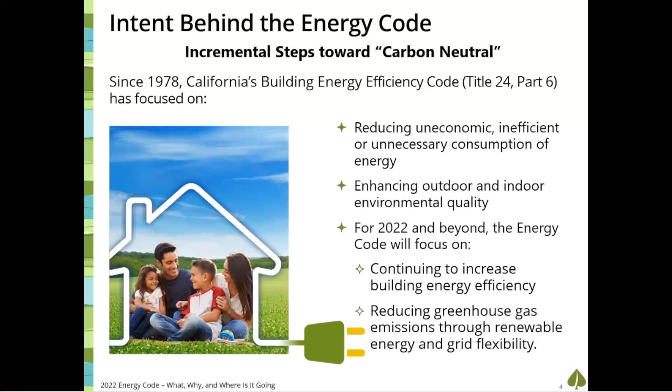If they're utilizing that energy, they're not drawing from the grid, and we have a much better or sustainable grid in that measure. So now some of the benefits of our energy code, I mean, these are self-evident, obviously. We've talked about a few of these in the previous slides, but avoiding building new power plants, they're very expensive. There's a lot of regulatory requirements to build new power plants, and most of the new power plants that have been built in recent years are fuel-fired or peak plants.

So they're not low emission plants. So if we can avoid that, we can not only keep our energy costs low, but we can also avoid those higher carbon emissions that would be embodied in that energy. So meet resource needs at lowest cost and least environmental impact. Again, if we can save energy, we can do that much more efficiently and economically than building new power plants. Increase building energy efficiency. That's a no-brainer.

Contribute to the state's greenhouse gas reduction goals. Again, some of those legislative actions, AB 32, the Global Warming Solutions Act, or other assembly bills and bills passed in the state to uphold our goals here. That bullet, enable pathways for all electric buildings. If that sounds like a no-brainer, let me give some context to that.

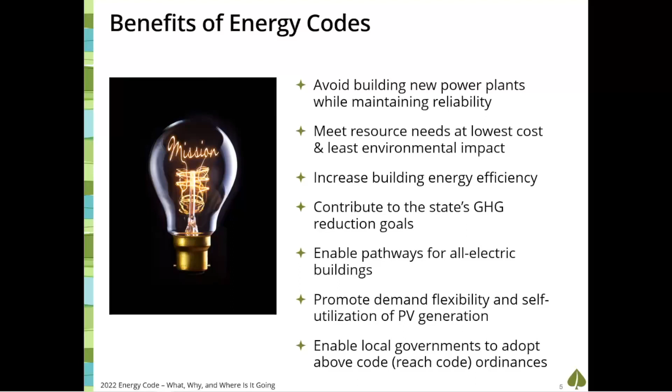And then lastly, our energy code does offer that option for local governments to adopt above code programs, ordinances. We call those reach codes. That's when a jurisdiction can go beyond what the energy code is. Our energy codes are minimum requirements. This is the bare minimum that you can build a home or a business to. And some of these reach codes, through the approval of the Energy Commission, have got above code programs that require higher performing buildings.

Now, we can see that our energy codes do serve a purpose, not just benefiting us as individuals. Excuse me. But we can see when we compare the per capita energy use, and this is electric energy use across the US, you can see that the intent or the benefit of our energy code has really paid off. Now, I can tell you that the demand for electricity has not gone down in California compared to the rest of the US. These are representing energy savings.

I don't know about you, but these days there are more and more things that are plugged in our households and in our businesses. Phones and gadgets and computers and TVs, and the list goes on and on. So that is really there to prove that our demand has not gone down for electricity, but through our energy code, our regulations, the usage of our electric appliances and systems has maintained a fairly level trajectory over the years that we've had energy codes in place here in California.

You can see that the remaining states in the U.S. have tapered off, but by far, California has made some major advancements and is really leading the U.S. in energy efficiency. Not to say that some other codes may have some more stringent requirements, but by and large, overall, the requirements that apply to all buildings in California are much more stringent than anywhere else in the states.

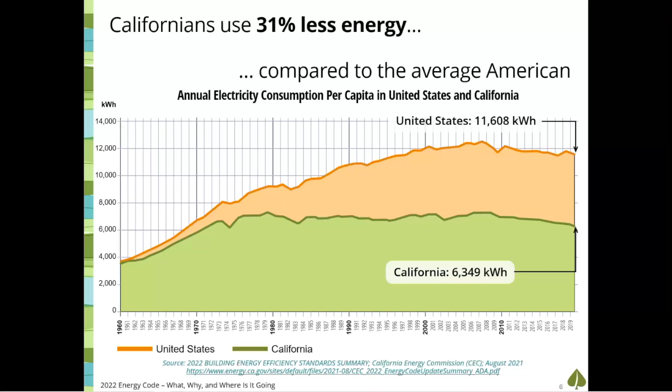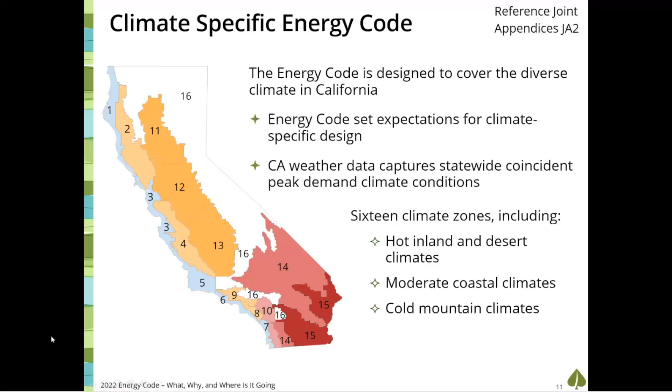Now, as far as our energy code requirements are concerned, we do have options for demonstrating compliance for our buildings. Now, mandatory measures, if they apply to your project, must always be met. And that really rings true with the name. If it's mandatory and it applies to your project, that must be done. You can't trade these off. You can't performance your way out of mandatory requirements. They just need to be met. And generally, mandatory requirements are determined to be cost effective in all climate zones. We've seen a few exceptions to some mandatory requirements that are specific for certain climate zones, but generally speaking, mandatory measures are measures that are cost effective. They save energy in almost any situation.

So these focus primarily on minimum efficiency requirements of our appliances, so heating and cooling equipment, as well as water heating equipment and any other appliance that could be plugged in our buildings. Distribution systems of those heating cooling systems, minimum insulation requirements for ducts, air sealing and testing for duct air distribution. We've got mandatory requirements that address health and safety needs, like whole dwelling unit ventilation requirements. Again, those aren't energy efficiency measures. Those are life-saving measures that apply to all buildings.

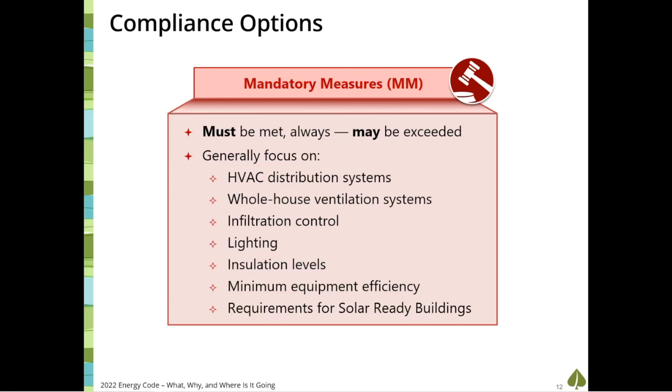Now, once those mandatory measures are met, there are two approaches that you can use to demonstrate compliance with our energy code. On the left-hand side, we have our prescriptive approach, and it's just that. There's a prescribed features list based on the climate zone that your project is located in. This is a very simple but, you know, easy or inflexible way to comply with our code. You go to the prescriptive requirements, and all of the features that are listed for your climate zone must be met or exceeded. And if you do that, then the project automatically complies. Still needs to provide the documentation to do that. But if you follow the prescribed energy features list, then your project meets our energy code. Very inflexible. There's not a lot of opportunity to trade off or provide some design flexibility.

That's why we have a performance approach, and what that does is allows the designer to test various ideas or concepts for providing efficiency to that building. So you can trade off certain features for other requirements, as long as the proposed building uses equal to or less energy than what the baseline is or what you're allowed to use. Now that baseline or the allowed energy usage is based on those prescriptive requirements.

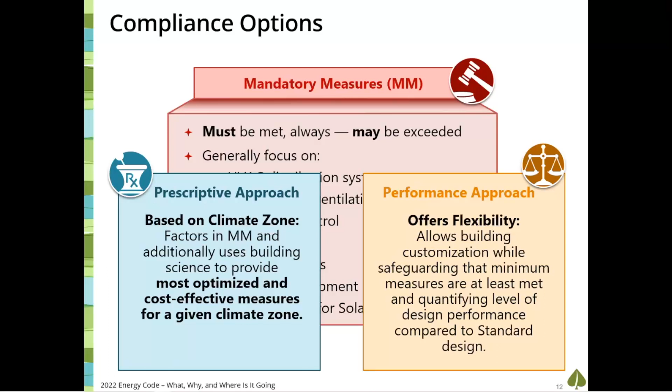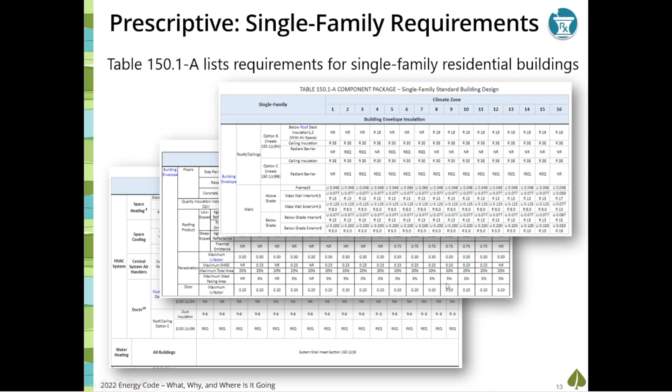You can see it goes through roof ceilings, walls, floors, talks about the quality of insulation installation. It's a HERS verified measure, QII. Roofing products, talking about cool roofs, fenestration, windows, glazed doors, skylights, doors, and goes on through our space conditioning and water heating systems.

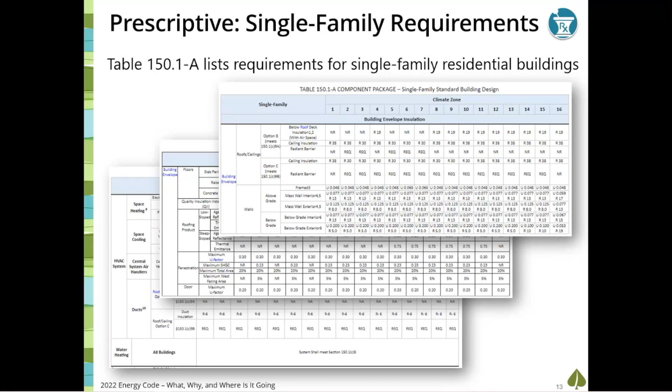Now, we have a very similar table for our multifamily buildings. This particular table is kind of a hybrid from the 2019 code. As I mentioned earlier, our energy code has dedicated chapters now for multifamily buildings, where those 4-story or more high-rise residential buildings found in subchapters 3 through 7 had certain requirements, and low-rise residential, 3-story and less, had other requirements in different chapters. Here's where we're seeing all that information coming together. Some requirements that applied only to high-rise residential now also apply to low-rise residential, and vice versa. So we're seeing a very flexible energy code, and the inclusion of those new chapters made this all possible.

So again, the same principle applies. Find the requirements that apply to your project based on the climate zone. And if you comply prescriptively, you would need to meet all of the applicable requirements for that climate zone in order for a project to be compliant. Otherwise, you would have to use the performance approach. So it's one or the other. In some cases, with some buildings, you can utilize both prescriptive and performance. But for single family and low-rise multifamily, it's one or the other. You can't use a combination of both.

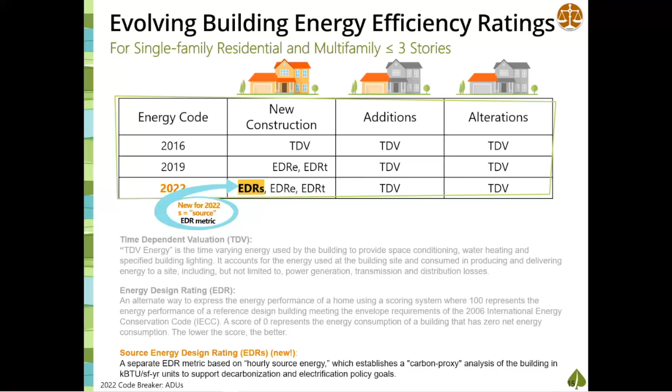Good question though. All right, a little bit more detail on our EDR metrics and how those apply and what features in our buildings are regulated under each of these metrics. You can see our source EDR, that's our carbon metric. It's a score representing the building's energy efficiency in terms of hourly source carbon.

Now, when we talk about source carbon, we're not just talking about the source coming from the utility. There is a fair bit of carbon, embodied carbon, in the generation of electricity from the utility. There is also some source carbon based on the fuel type chosen by the builder or occupant or building owner. So both of those are regulated under this requirement. So even if you have an all electric building, well, guess what? You still are, I don't know what the term is, but using a carbon-based energy unit.

So until our utilities, which are regulated and have a goal to be, I think, and maybe Long, you can help me. I'm not really familiar with some of the generation, but I know the utilities are required to have a renewable portfolio by a certain date and time. So really that's regulated by our Public Utilities Commission.

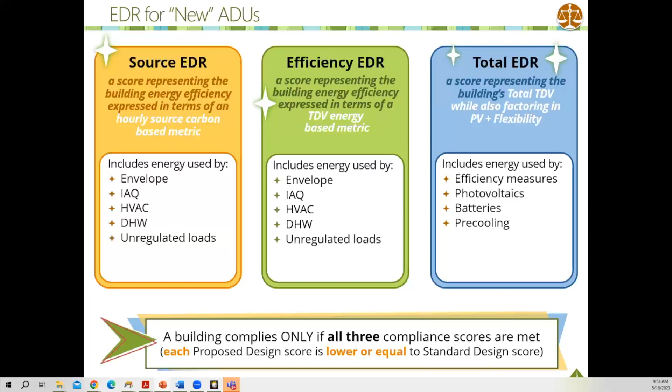So those flexibility measures include battery storage systems as well as for residential, a pre-cooling strategy where a thermostat would disable the cooling system during those peak pricing periods. But prior to that, it would pre-cool the home to a temperature set point, 4 degrees or greater less than what is normally set, and then turn the system off so it can coast through those peak pricing periods. So now, for a building to comply under the 2022 code, all three of these metrics must be met. And I'll give you an example here.

This is from the CBECC-Res software. Actually, it's the state's public domain performance software for single-family homes. We can see what our proposed and standard design metrics are for each of these three compliance metrics: source EDR, efficiency EDR, and total EDR. The proposed design, that's the number on the bottom, needs to be equal to or less than the number on the top.

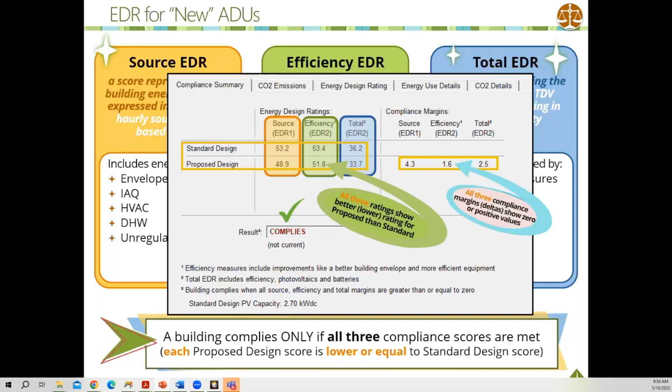So moving over to the right, these are the margins, basically the math. You subtract the proposed design from the standard design, and it'll tell you what the delta or the difference is. And if any of these numbers are negative, the project doesn't comply. So all three of these metrics must be met for a new construction project to comply under the 2022 standards. So good.

Looks like we have a comment. The good news is that with CCAs, power generation is cleaner than before. I agree with that. Yeah, there are a lot of the CCAs that have 100% renewable energy. Although the greater number of ratepayers in California are supported by the investor-owned utilities. So we're seeing a trend towards all electric generation. So I know that we're heading that direction with the CCAs, but I'm sure soon we'll have more of the utilities on board with the 100% renewable. So yeah, great comment though.

Now, I want to tackle what's new for single family at a very high level here.

Not going to get into a lot of detail, but we just went through the brand new performance metric. So the new metric that was added for single family was that source EDR metric, really incentivizing homes to be built to all electric requirements. In fact, we're seeing some mandatory requirements to provide the provisions to going all electric in the future if a gas appliance was installed.

Also along with that new metric, I mentioned this in the previous slides, there are new prescriptive heat pump space heating and domestic hot water requirements based on the climate zone. Again, going back to the performance approach versus prescriptive, if the prescriptive requirement sets the baseline and the baseline for water heating is a heat pump water heater, then using the performance approach, you're going to be penalized for using a gas water heater. So just want to reiterate that that's how our performance approach works.

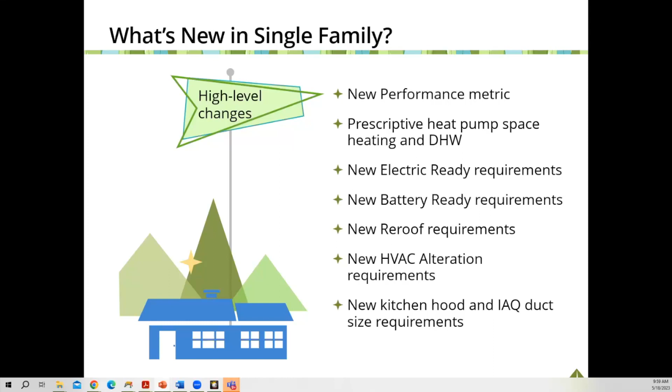And lastly, we have some indoor air quality requirements where our code now addresses kitchen hood exhaust fan requirements based on the square footage of the building and the type of fuel that's used for the cooktops. You can imagine a gas cooktop is going to have higher emissions than an electric cooktop. And therefore those hoods need to move higher amounts of air or capture more of the gases that are coming from that cooktop.

So good. Now it's what's new for multifamily. Again, we've got brand new chapters in our energy code, subchapters 10, 11, 12. Those again are specifically for multifamily buildings, where they were in various sections of the code prior to this code cycle. We've got new forms that are specifically designed for our multifamily buildings that are 3 stories and less. Those are the LMCC, or low-rise multifamily certificate of compliance. So again, those are brand new forms to cater to that specific building type.

We've got brand new software. So for the performance approach, buildings that were 3-story and less were run under the residential software, and multifamily buildings that were 4-story or more were run under the non-residential software. Now they're all together in one software, and that happens to be the non-residential software. And that was really a judgment call by the Energy Commission, and I fully support it.

Multifamily buildings in some cases also have a mixed occupancy element, meaning that they may also have non-residential spaces, non-tenant interactive spaces. These are open to the public. And that was really the rationale for moving all multifamily buildings under the non-residential umbrella of performance software. We've seen some changes to envelope and fenestration requirements. Again, our energy code requires that the code become more stringent every 3 years.

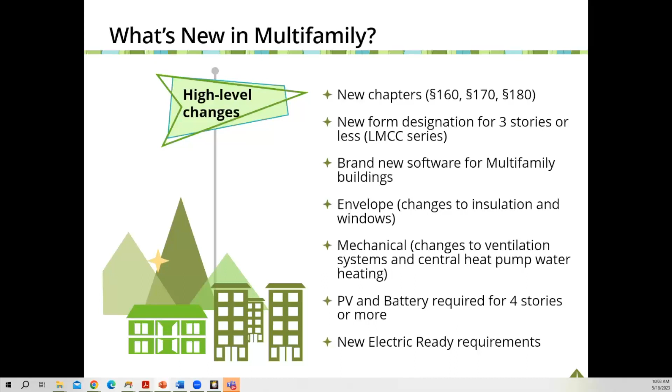So lastly, we again have new electric ready requirements that we talked about under the single family. Those apply to both low-rise residential as well as our high-rise residential. So any of those appliances, cooking, space heating, water heating, or clothes drying, if any of those appliances are gas, then the electric infrastructure would need to be installed for the future installation of that electric appliance.

Good. Again, please let me know if you have any questions. Happy to dive a little bit deeper into some of this information here. And we'll have some Q&A time towards the end here.

So getting into some of the specific PV requirements, these requirements are specific to the single family, what I'm showing you here, section 150.1 C14, but the same requirements apply to our multifamily 3-story and less. So essentially, the minimum capacity of that PV system prescriptively is set by this equation. The DC rating of the system is taking into consideration the conditioned floor area of that dwelling, as well as the number of occupants. So CFA is the floor area, and the N factor, number of dwelling units, and the occupancy of that building is taken into consideration. And really the outcome of this is to set what the minimum PV system capacity is.

Our energy code sets the minimum capacity, it does not have a limit on how much PV that you can install. That's up to the utility. So Energy Code sets minimums, utility sets the maximum capacity. And by and large, those are set by our net energy metering rules, our NEM rules. You might have heard we have new net energy metering rules, NEM 3. Some of these requirements have changed the amount of incentive that the utility ratepayers get for generating electricity, which is really designed to help encourage adding battery storage to our system.

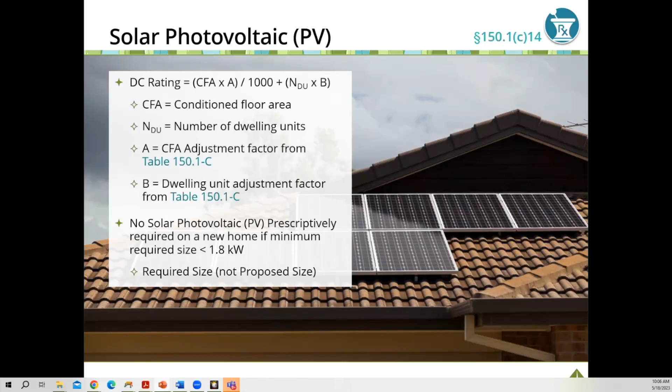So good. Now, I want to get a little bit more detail about some of our other mandatory requirements. I mentioned energy storage systems. These are all found in subchapter 7, so section 150.0, specifically 150.0 S, if you wanted to go there in the code and check it out, requires at least one of these options to be met. So either put the interconnection equipment in, right, with a minimum backed up capacity of 60 amps. So that means you're installing a battery system and all the interconnection to take advantage of it.

Or you can install a dedicated raceway, which is a fancy word for conduit, from the main service panel to a sub panel that supplies branch circuits. Now, these branch circuits are listed in the following bullet: branch circuit to the refrigerator, lighting circuit near the primary egress, a sleeping room, and one other circuit of your choice.

So these are primarily backup power situations. So it would save the occupant from having to install or rewire those branch circuits to meet their needs in the future. In addition to those branch circuits, minimum bus bar rating of the main service panel of 225 amps or greater, reserved space for the future isolation equipment and transfer switch within 3 feet of that main service panel, as well as all of the conduits installed for that.

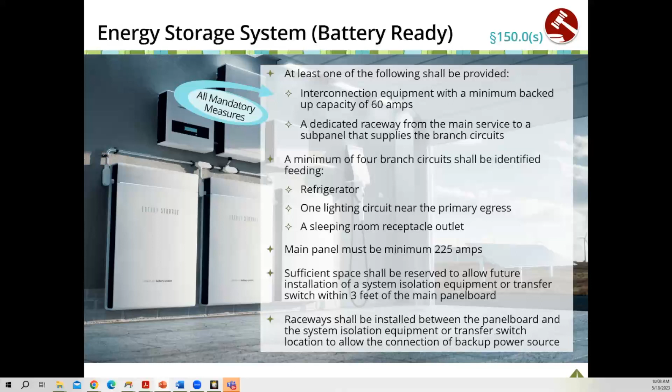But by and large, this is just a measure to cost effectively allow the owner or occupant to change to electric technology or heat pump technology rather than be dependent upon that gas fuel source. Now, this applies to water heaters, these all are independent requirements. It's not if you install one, you have to meet all these. It's only dependent on the feature or appliances that are gas.

So if you install a gas furnace, you have to provide the infrastructure for the future installation of a heat pump air handler. And that really is designed to provide the power for the heat strips. This is technology that provides supplemental electric resistance heating during those thaw cycles of a heat pump. So not sure what your understanding of heat pumps are, but they don't produce heat continuously, right? They intermittently have to go through a thaw cycle.

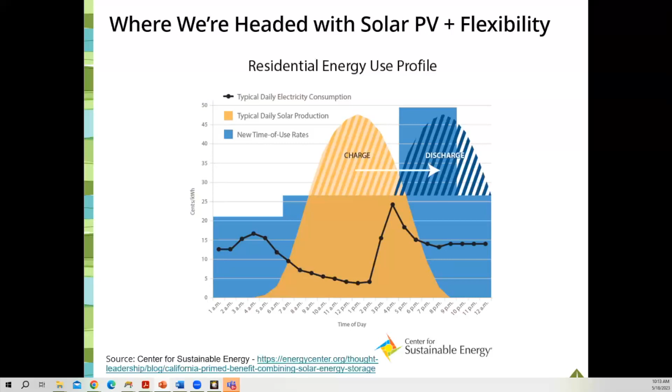So utilizing a battery rather than exporting that energy to the grid during that peak pricing period, you can self-utilize that energy, by drawing from that battery rather than drawing from the grid. So this is really just a very common sense approach to taking advantage of that energy we generate on our own buildings and utilizing that rather than taxing our grid for that energy or exporting energy to the grid when it's not necessarily needed. So good.

Now, some of the other programs that you might want to have an understanding of are our statewide codes and standards team that are represented not only with our compliance improvement, but also our advocacy as far as reaching greater energy savings. And this is primarily done through our REACH codes. So our Energy Code ACE team, or our statewide codes and standards team, enlists other consultants like myself to provide financial analysis of features and measures that could be adopted by local jurisdictions and provide a REACH code, an above code program.

So we also have a website, localenergycodes.com. It's a valuable tool to understand whether or not there is a REACH code in the jurisdiction where your project is located. So you can go to that website. There's a very nice interactive map, and that interactive map is connected to local ordinances. So you can download the ordinance of a jurisdiction and read through that ordinance to determine what above-code requirements would apply to your project. So very helpful tool, very good website to bookmark.